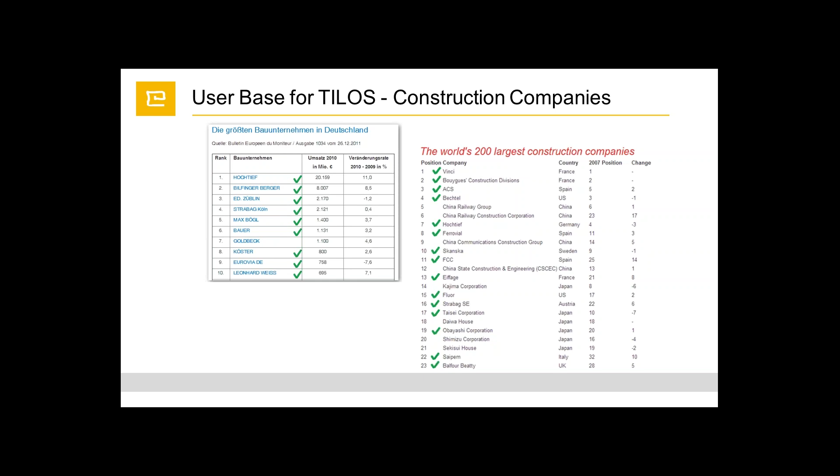Now, linear project characteristics. As we know, linear project characteristics refer to projects like pipelines, railways, highways, tunneling, engineering, and transmission line projects. These have an axis along which the work is performed.

We know that linear projects have repetitive activities that go along the length of the project. Our goal is to optimize the productivity rate, reduce the project duration, visualize the project area, and minimize the overall cost.

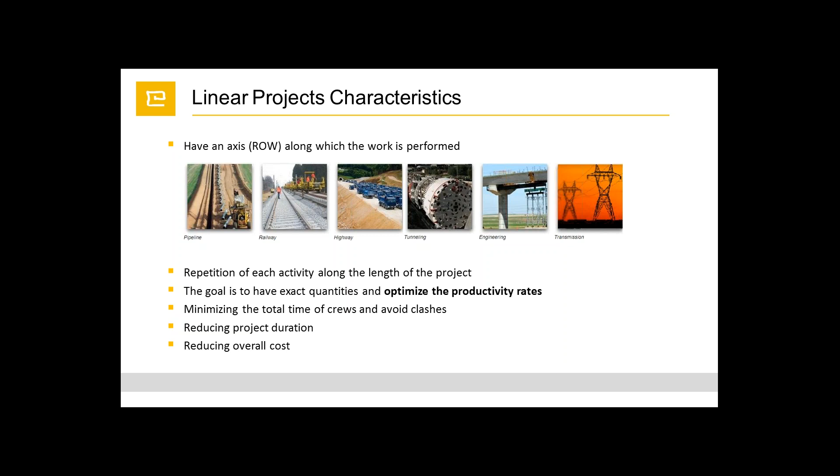As you can see, TILOS can be used in any linear project.

So what are the benefits of using TILOS? The main benefit is that instead of a 40-page report like in Primavera or MS Project, you can see your entire project in one page. This is Primavera, and this is TILOS. You can easily visualize where and when each activity is taking place.

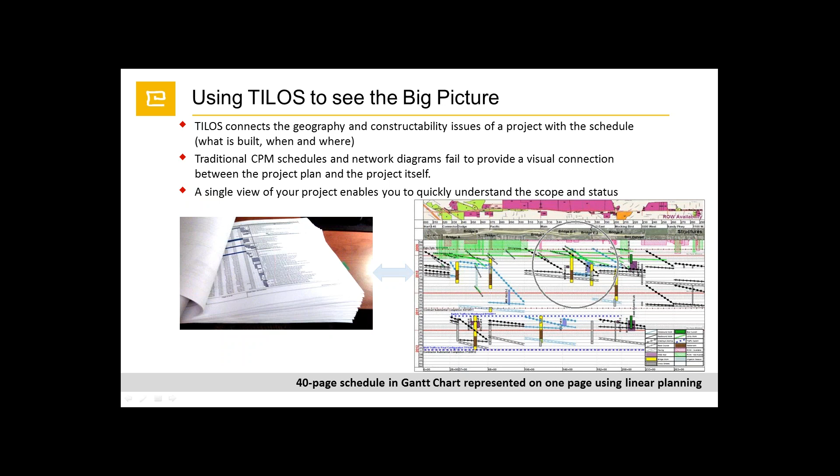This is a traditional Gantt chart where we only have time, only activities shown against time. TILOS instead uses a two-dimensional chainage view, where we have both distance and time.

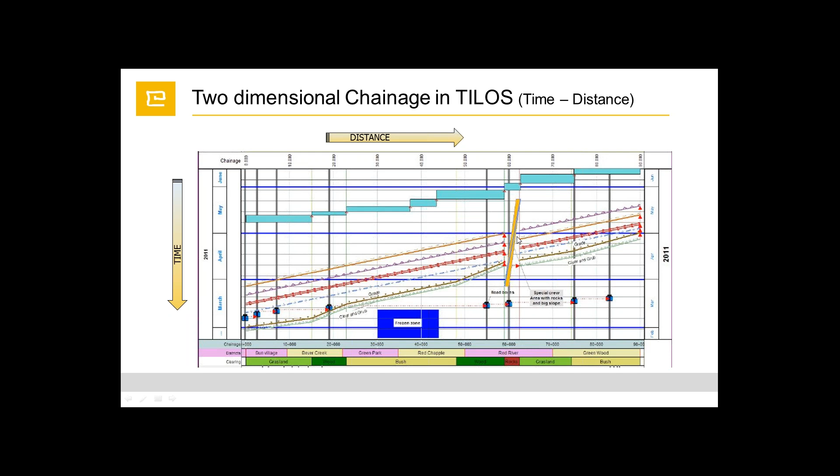Later on, I will explain how we can analyze this view. So, how does TILOS actually work? We have a main working area here.

On top, we have the distance axis. This is a sample: let's say we have a 4-kilometer project that takes 3 months. All of this is adjustable—you can set it in years, weeks, days, or hours.

To further support our work area, we can insert the graphical part of the project, as well as the elevation profile, showing the road level, the cut area, and the fill area.

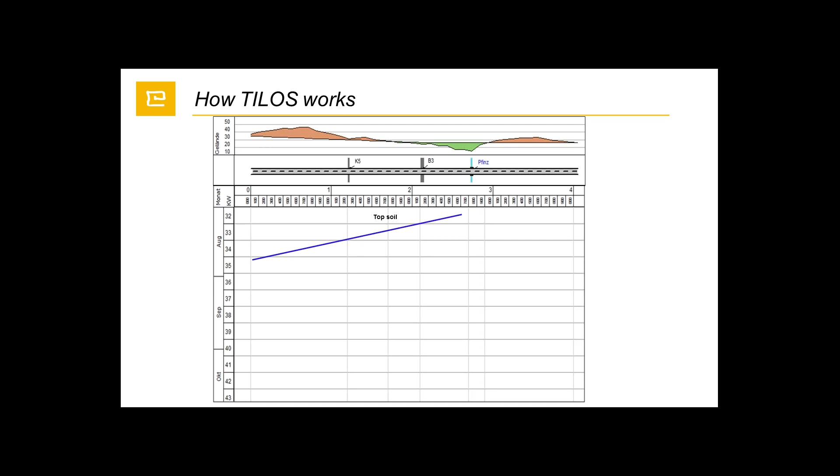Let's say we have one activity starting from 2.6 kilometers and going down to the beginning of the project, taking 3 months.

Another crew starts from the other side of the bridge. You can see we have a bridge, and by the way, these are intersections—this is a road intersection, this is a rail intersection, and we have a culvert here.

The second crew starts working on the topsoil activity from 2,600 or 2,800 until the end of the project, at 4,000.

TILOS can also manage not only linear activities but also structural works, such as a bridge, for instance. The bridge can be set up as a summary task and divided into parts like the foundation, abutment, and deck.

Also, we can see here that we have cut and fill activities. So the question is, why is this cutting activity different from the topsoil activity? Well, as you can probably already recognize, this is one activity which has two breakdown points.

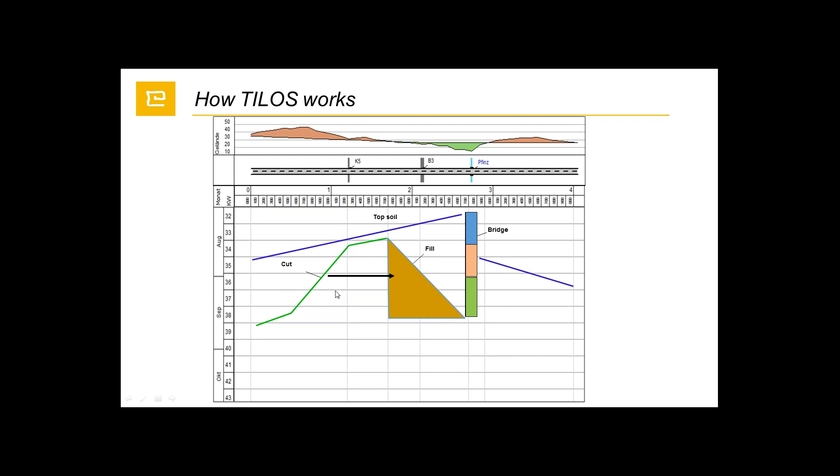So when we do the planning, or create the activity, we'll be able to see that we cannot perform here. We'll have here the clash.

Okay, another activity, let's say we are putting here the grading. The grading will start as more amount of soil. We can say that it will start from the beginning of the project. It will take 1.5 weeks and will reduce later on, and then we'll finish our testing or stabilization part.

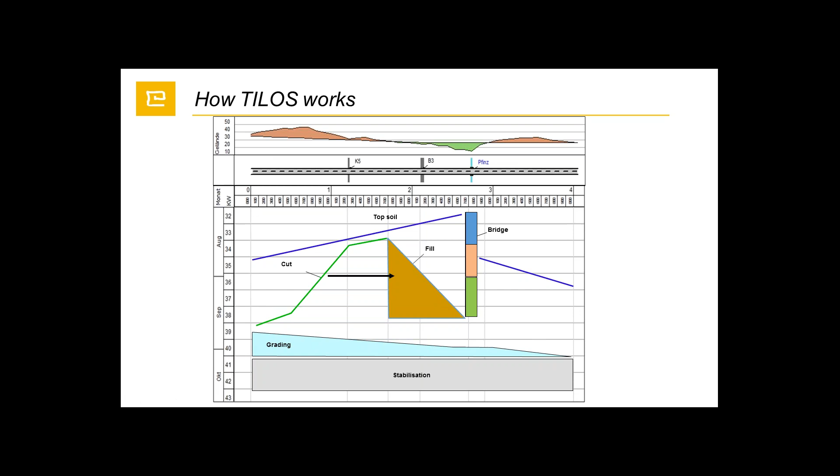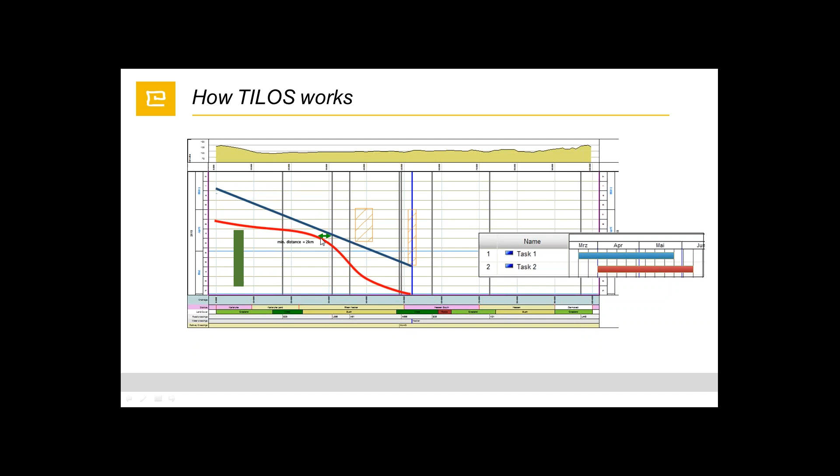So what we do in this case, we are able to move it as well and put distance lags between the activities. For instance, we can put it on a daily basis, monthly basis, or length basis. We can say it's a 2 kilometer lag between each activity.

TILOS has integration with the GIS module, with the graphical illustration. In this case, we use a standard application, Google Earth. As you can see, we have here the project. Now we have the main activities, let's say earthworks, structural works, track works, or HT lines. This is the main activities.

Let's say on Monday, April 22nd, we are able to see that our crew starts working on this distance and is performing this part of the project. Another crew is working here and the rest here. When we move to May 6th, we can see that our crew moved. So this is a progress monitoring. Our crew moved to a different location.

Okay, or we can set it up so that we have two crews just starting from the beginning and from the end of the project, and they'll have a meeting point here. So as the work is performed, each activity is performed, it is highlighted, and we are able to see exactly where our activity and our crew is right now. What is our progress? Some of the reports which we are able to provide.

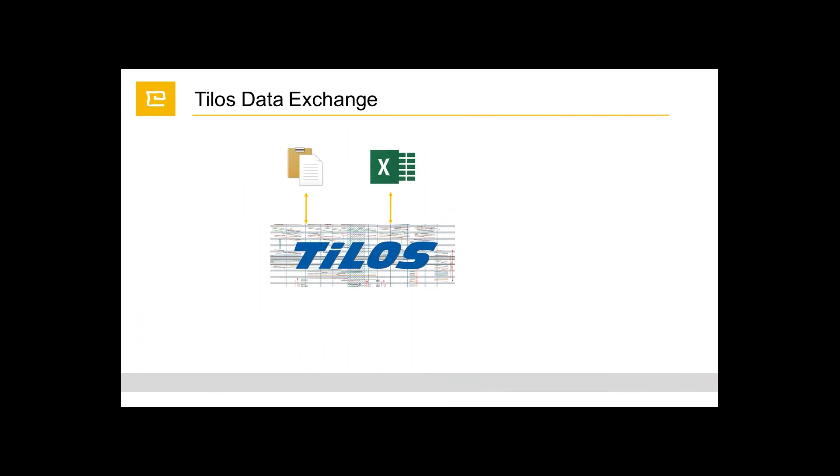TILOS has a big advantage in integrating with other systems. For instance, if you are a master user of Primavera, MS Project, or Asta Powerproject, you are able to transfer your project data into TILOS from the clipboard, from Excel, or from MS Project, P6, and Asta Powerproject using the XML format.

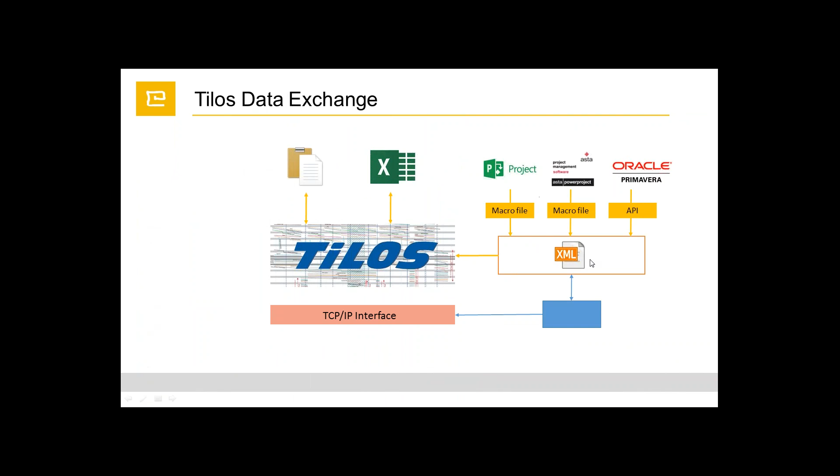So where do we use TILOS? We are able to use it at any project stage, whether it's feasibility studies, overall plan, production plan, or special cases. It's also used in pre-design, planning, procurement, execution, and claims, and it can be used by owners, engineering companies, subcontractors, contractors, or suppliers.

Summarizing my presentation, I'd like to say that we are able to use TILOS at any project stage level. Whether you have an ongoing project, we can implement it in TILOS, or if you have a tender stage, we are able to prepare your project as required, with multiple choices available.

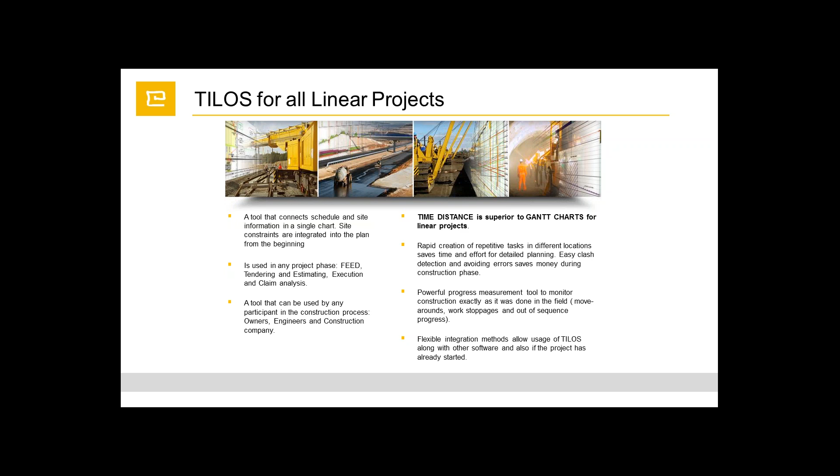Okay, now I'll go to the live demonstration of the project. Let me start TILOS first.

We create our project starting by clicking New. TILOS has a predefined template, which you can adjust, or you can create your own template to use. If you are doing mostly road or highway construction projects, you can set up one TILOS template which will be used across different projects. In this case, we'll take the general template.

Setting up the project, we have the project name, the distance unit, whether it's meters or kilometer plus, then the start distance and end distance of the project, the start date and end date. Now we can set up the base and time unit, and set the default calendar, or adjust any calendar you'd like. You can create your own calendar according to your country requirements, whether you have holidays or a winter period when you cannot perform work. You can set up your calendar and create your project accordingly.

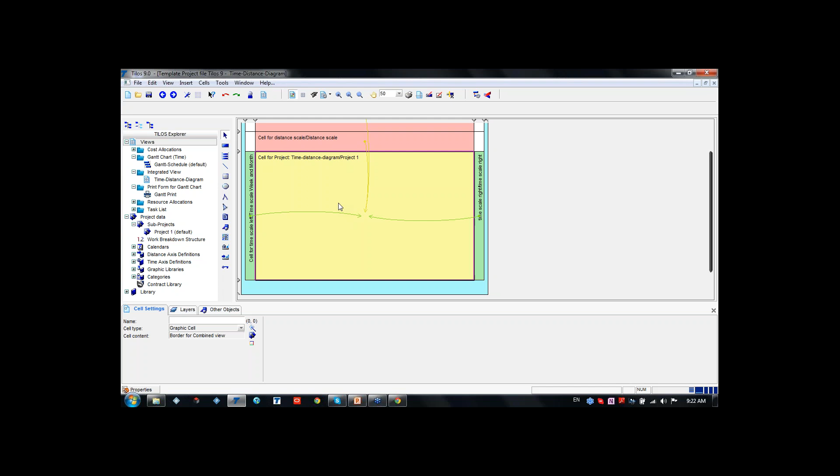By clicking here, we can see that all data we enter into the main area will affect the rest of the cells. So if you look at the lines, these are all connected.

All right, so let's say we start the project from zero, and we have a project over 10 kilometers which will take around 5 months. Let's create this simple task — for instance, we have topsoil stripping.

This is a quick navigation where we have a library, and in the library we have task templates which are already predefined. As you can see, each task is predefined, and we're also able to see it in our library part — task libraries, task templates. Let's go to earthworks and topsoil stripping.

Each activity — well, one of our customers called it the cosmetic works. However, it is true, it is cosmetic works — we are able to set up the shape colors, then the pattern.

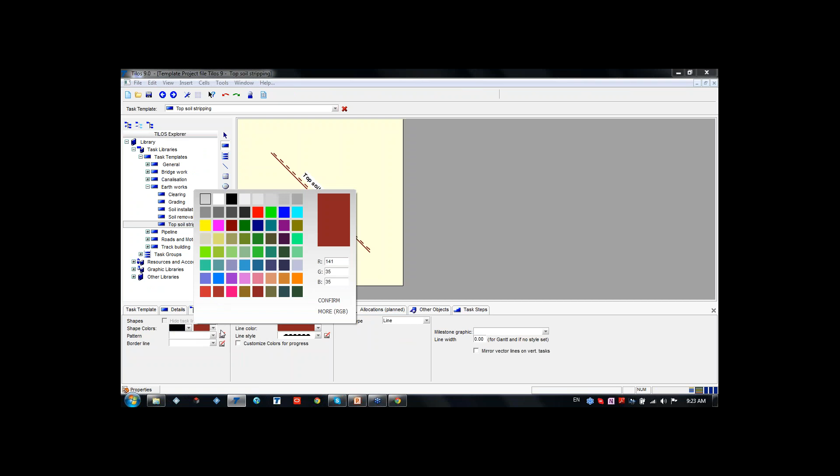As well as a display tab, it can be the rectangle or parallelogram. Just a second, let me select, and you'll be able to see the rectangle, parallelogram. Let's say we'll create it — we are able to set it up.

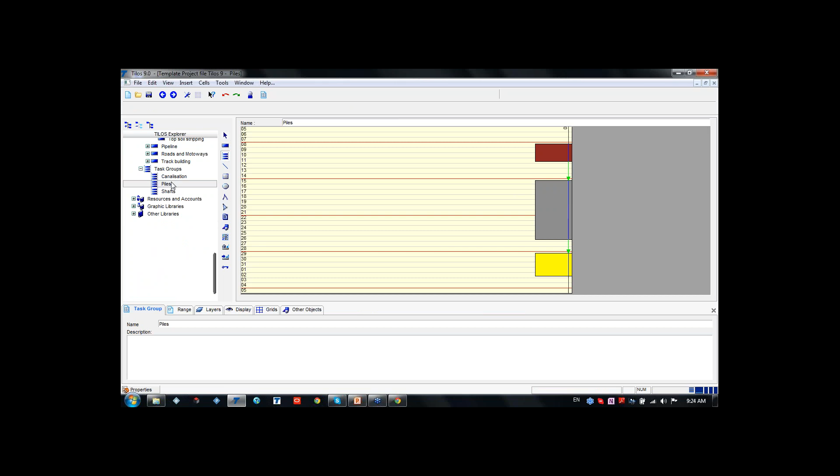Now this is just a task. If you go to the task template, here you have task groups, shafts, piles, canalisation. This is an already predefined task template which you can easily edit or add to.

Let's say I want to add another activity here, and it will be not the topsoil stripping but the trench closing. You can save it and you will have it — you will have the ability to easily enter this task.

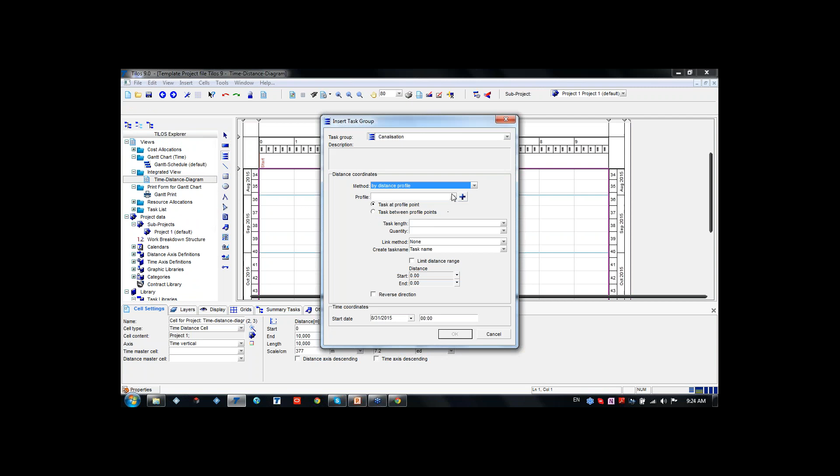By adding, let's say, the distance profile, important location.

Anyway, these are activities. Let me create one activity which will start from the 0 and will finish at the end of the project.

So we are able to put the text annotation accordingly. We can put the name, the quantity, the unit time. Moreover, we are able to put the date, let's say the end date time. As you can see, we have here the end date already inserted.

The ability of TILOS gives us a big opportunity to manipulate with activity. As I mentioned before, we can change the display of the activity, the coordinates. The coordinates are really important. We are able to put the exact start date, end date, and length, also the duration.

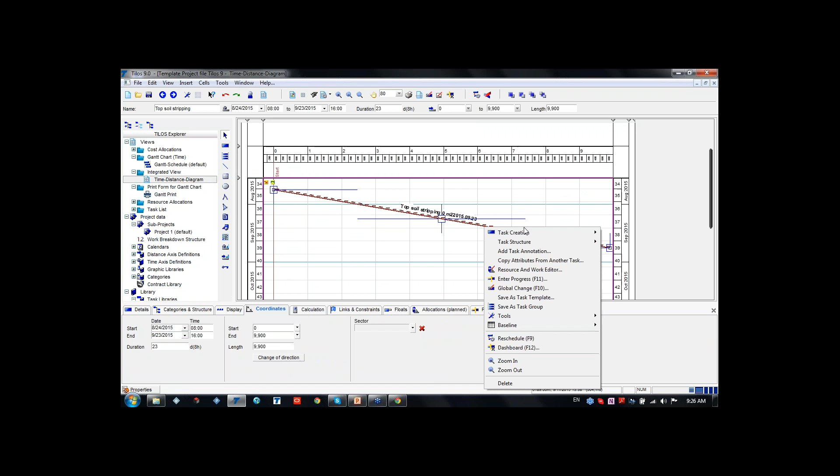Let's say we have two crews and we would like to split this task. The split methods: we have the by the distance profile, by the sector profile, split in three parts, date or duration. This time we'll split by the distance, and let's say we'll have a split into two crews. As you can see right now...

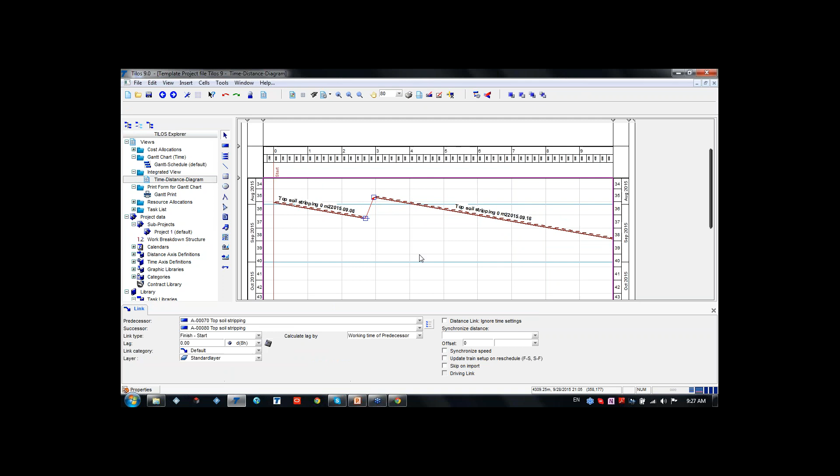Our activity is split. The linking option: we can say that once this activity is finished, we'll start another activity, and let me press reschedule.

Now we are able to see, or we would like to indicate that there is a lag, let's say 4 days lag. We are able to see that after rescheduling, this activity, in the red part, another part of the activity will start after 4 days, since this activity will finish.

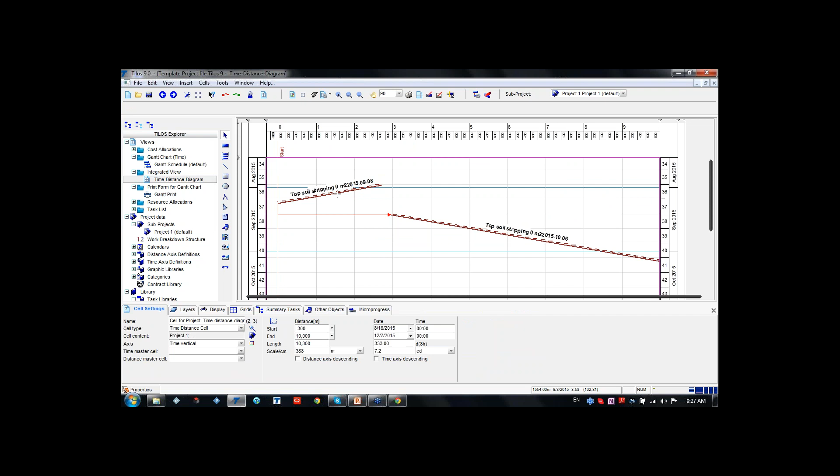Even after splitting the task, we are also able to change our direction to indicate the link as a finish to start, start to start, or start to finish. Calculate the meeting point, let's say the start to start. Then reschedule. So right now this linking is as a start to start.

We are also able to display on our main area the time grid, whether it's weeks, months, or year. We are able to put it. So these cells are adjustable, as well as these ones.

So we are able to also insert our location. Let's say when we go to the distance axis definition, as a distance profile, we have where you can actually set up your distance profiles. When we go to the important location part, we have a start. Let's say we'll enter on 1200. We have an intersection.

On the 3000, we have a crossing. On the 4000, we have a culvert. And let's say on the 5000, we have a second intersection.

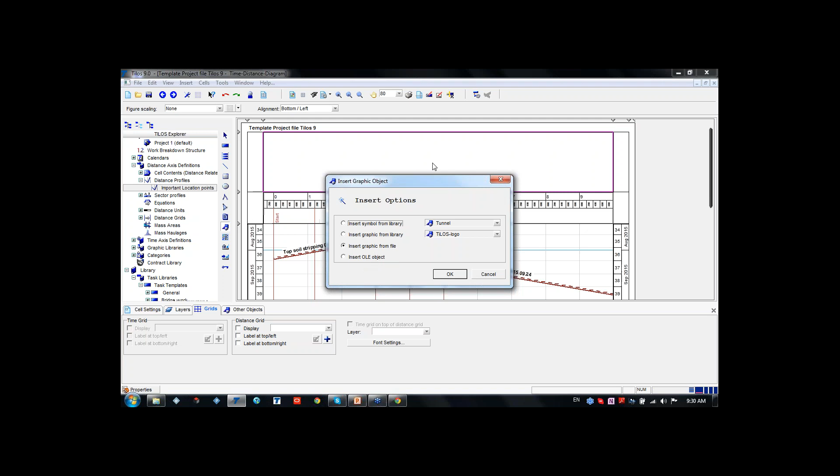Okay, here what we have is our graphical illustration, and we would like to adjust this for each crossing regarding our crossing as well. So what we do in this case is click the scaling as both axis, and we'll adjust the position accordingly.

Start distance from this 3000 until the 4000. Now we are able to see that this mile street is on 3000, starting on 3000, and will end at Jefferson Street. However, I named it as culvert, but let's say this is another crossing, and it will have a 4000.

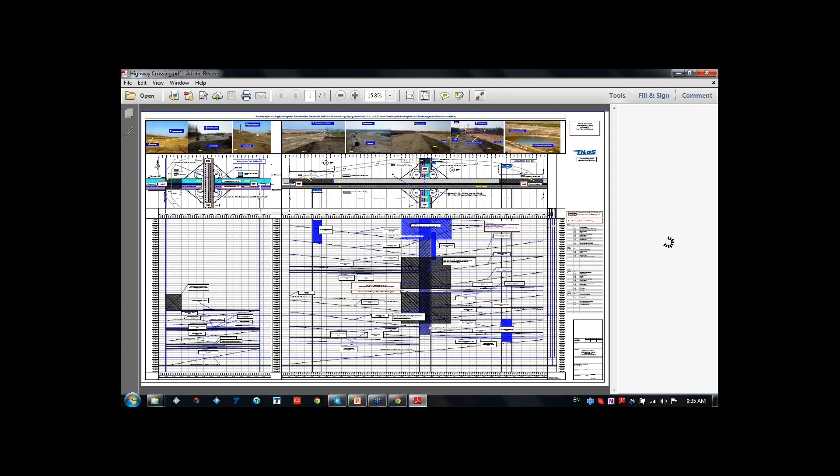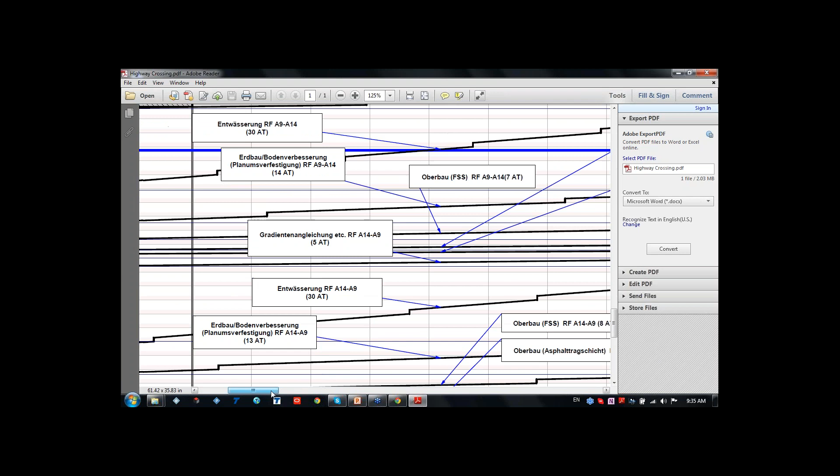All activities have a name. These people didn't want to put much more cosmetics on it. That's why it looks like this.

I was also asked if it's possible to show the report, or the view, not only on one page but for separate activities. Yes, it is possible. Let's say we have an individual task report.

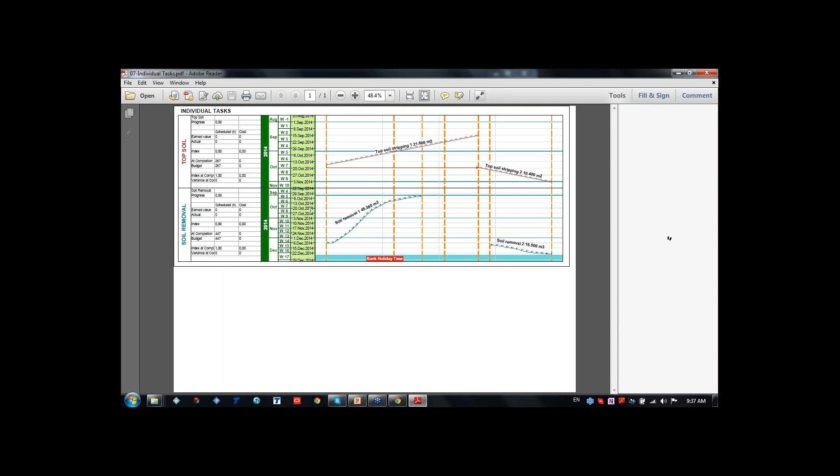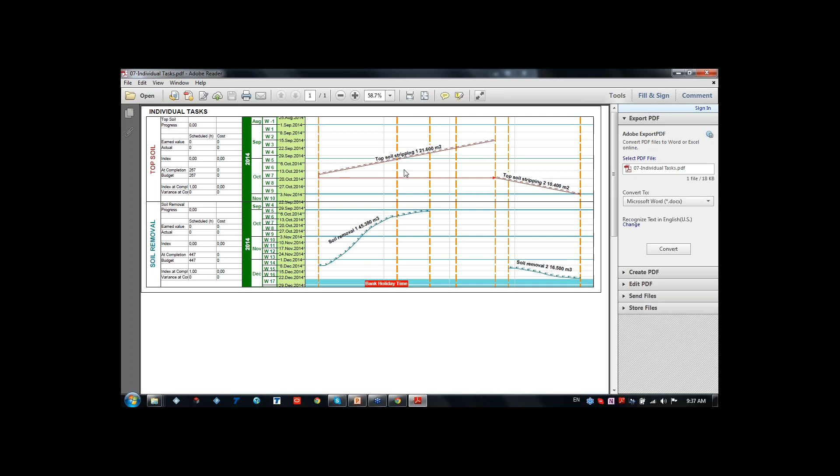It is possible in TILOS using categories or filters to put the progress, earned value, and actual for each activity. We have filtered each activity, and we are able to put on a separate page the report as well as a performance dashboard, as TILOS has dashboard reporting.

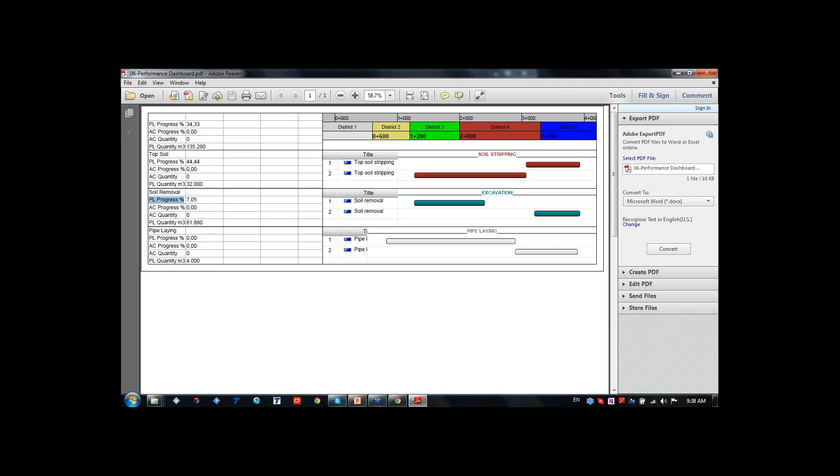Let's say we have planned progress, actual progress, planned progress for the topsoil activity, soil removal or pipe laying. It's indicated in which sector, in which kilometer, which activity, and it's also shown as a Gantt chart - just a standard Gantt chart reporting regarding the distance.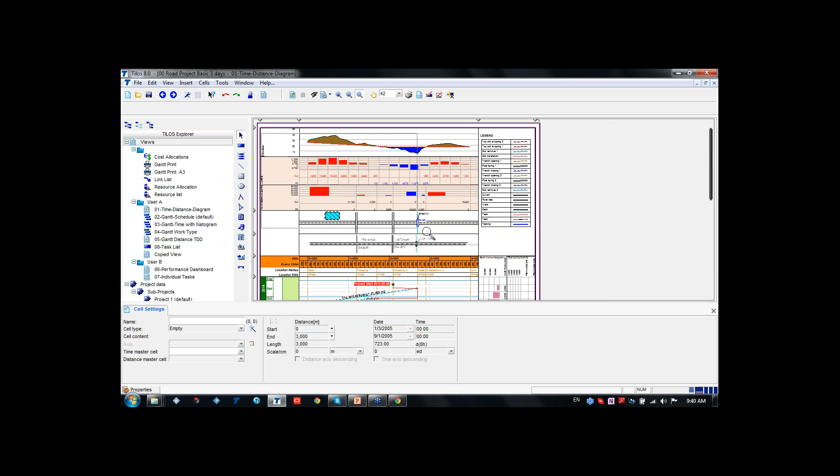So I have a project here. What we did is indicate the elevation profile. This is the planned roadway. This is the elevation profile, the cut and fill activities, cut and fill amount - where and how many cubic meters we have to cut and fill.

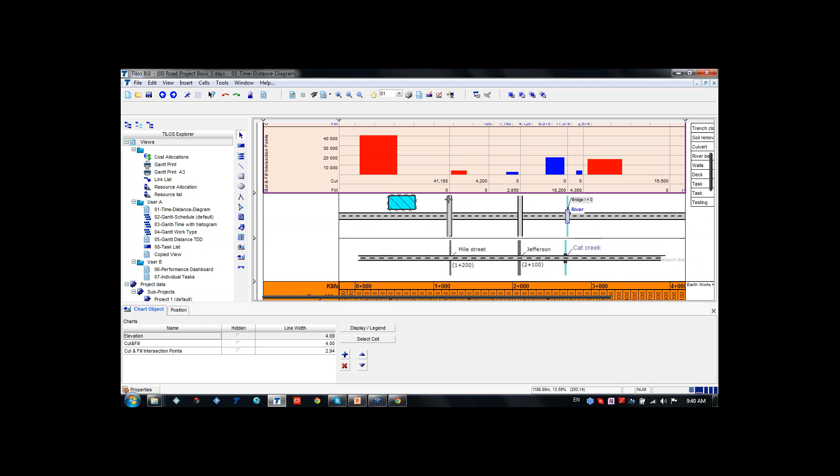This cut and fill histogram regards the intersection points. Let's say we have an intersection here, a road crossing, rail crossing, and a bridge, and we have indicated that between each intersection, what our cut and fill amount is. Graphical representation of the project.

We indicated the scale. Let's say we have a 4-kilometer project. We indicated that we would like to see each 100 meters, the location names, location kilometrage. Then on the left side, we are able to see the date, the week, months, and years. On the right side, the histogram of the earthworks and pipeline.

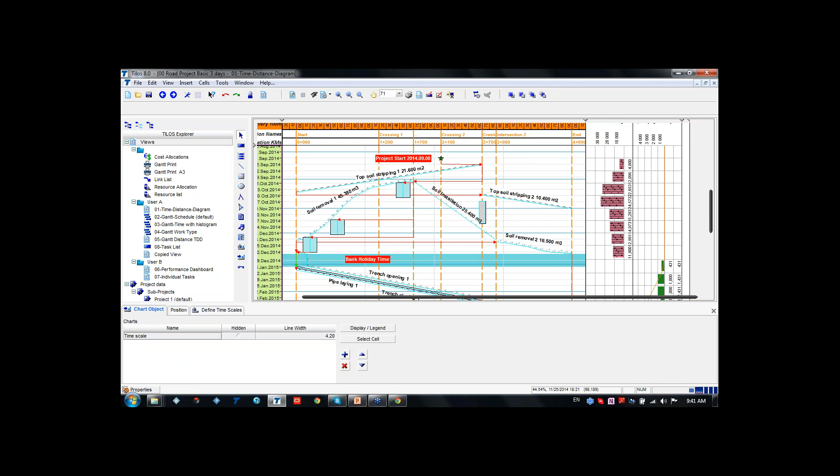This bank holiday is already predefined on our calendar. So we have a project start date, the topsoil activity, the topsoil removal, the second part, and all are the links.

Also, we're able to see the task list not only in this way, but if you got used to the traditional way, we're able to see our task list from here. We're able to see the name of the task, ID, the WBS structure, to which sub-project these tasks are related, the calendar, task types, whether it's a hammock task or summary task, the milestone, start date, start time, end date and end time, duration, start distance, end distance, length, sector, if we have indicated this to the sectors, layers, quantity.

So all information about the task we are able to find here, or just by clicking the task, we go to it. If it's work type, we have indicated it's a clearing, and the display, the coordinates, let's say we have a duration here, and actually it is automatically created. The calculation, we have a quantity factor, you can input the quantity factor, the planned work rate, the quantity, and the duration. Also, we are able to put the units.

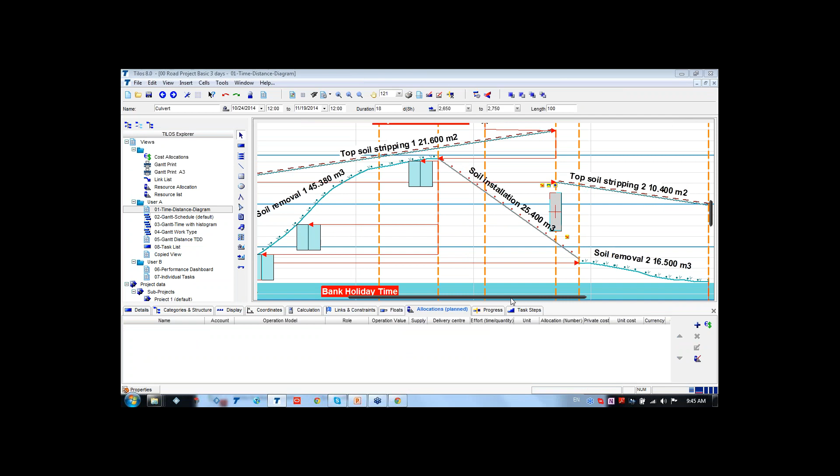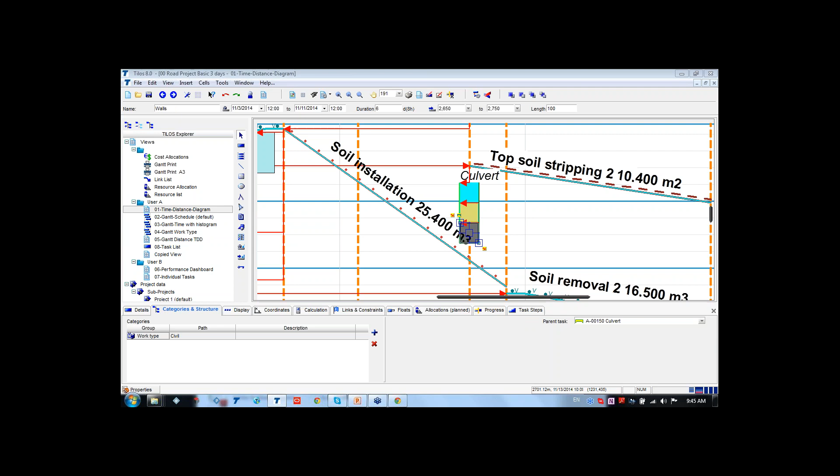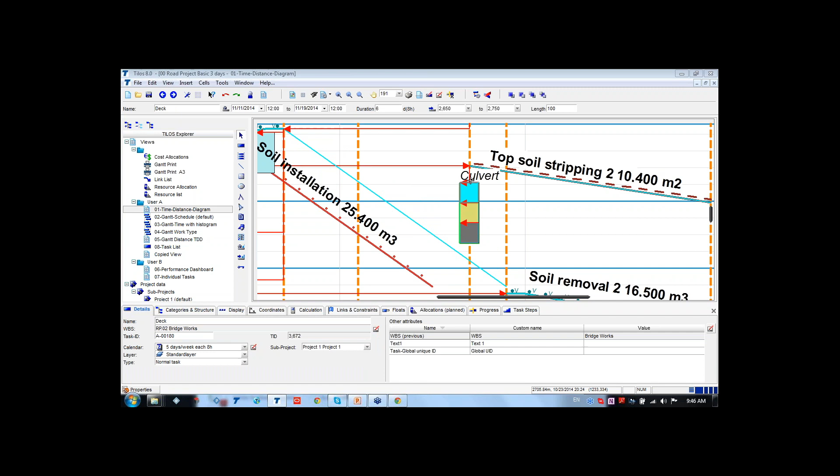Let me try to show here on the bridge part. Are we able to see the bridge part? So this is a summary task. When we click here, we're able to see that this summary task, the WBS, is divided into other different parts. Let me just remove this one. This is a culvert, and we have here the riverbed, then the walls, and the deck. So everything here is recorded as a summary task.